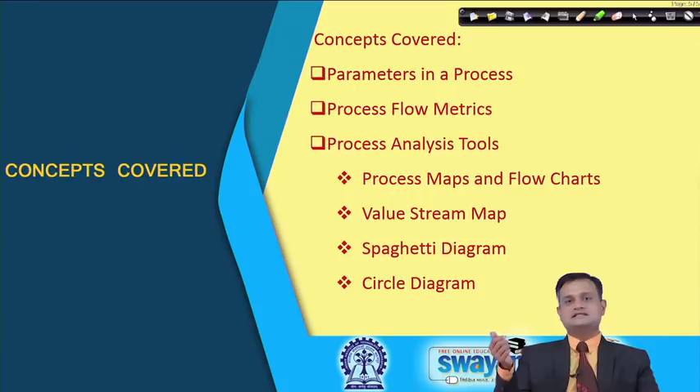So let us begin with a very simple question: what is a process? Some thoughts are coming in your mind, and let us try to put it in a structured way.

A process is a collection of activities that transform your input into output that are valuable to customer. So not that I will deploy the resources, machineries, equipments, people, setup, and I will just convert input into output. I need to see that my output is valuable to my customer. So any part of an organization that takes input and transforms them into output is a process. You may have a transactional process like accounting, finance, or maybe customer service, and you can have manufacturing processes like your regular production and other activities.

Process analysis is to systematically examine all aspects of the process to improve its operation with regard to cost, quality, speed and responsiveness. So I am putting here 4 different important criteria: cost, quality, speed and responsiveness. If my process can really satisfy these 4 criteria, then I would say that I am executing with a right and adequate process.

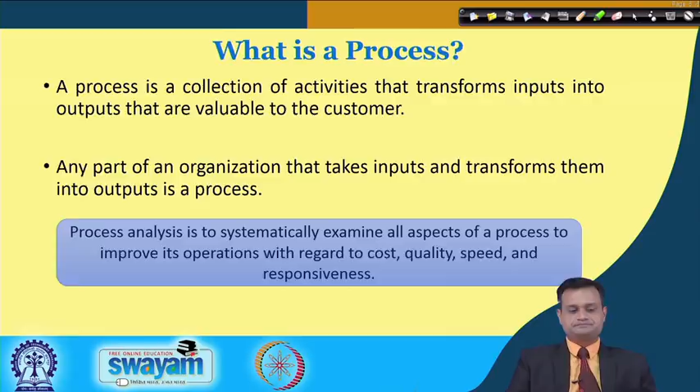So just see the input output diagram, and you will get an idea that every process has a set of inputs. It goes through the transformation process and you convert it into a set of outputs. Typically you have machine, man, material, measurement, methods, maybe your mother nature and management. These are the typical inputs which go into the process of transformation, and as a result you have output, product and services.

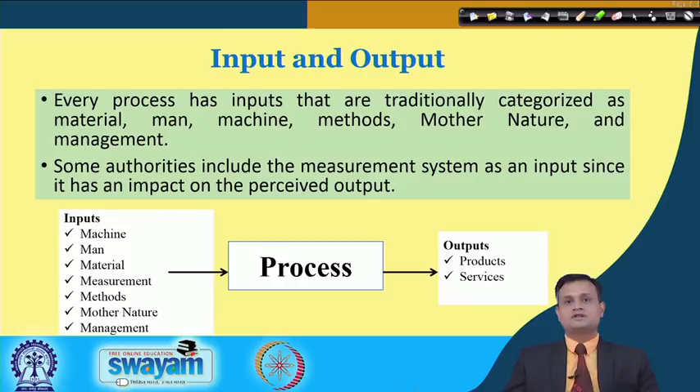So there is an important tool in order to analyze the process, because please understand that process is not something which is taking place in a very narrow domain. When we talk about process which can satisfy the customer requirement and leads to value creation for the customer, then it is not only a functional process, we must broaden our understanding on the scope of the process.

So here there is a very important tool called SIPOC. This tool basically helps us to jot down the various issues specific to processes taking place at different places in the value chain, in the supply chain, and then it helps us to see the proper linkages, set the metrics for regular and continuous monitoring of the processes.

So supplier is basically the internal and external providers of resources, materials, sometimes knowledge and services that the process requires. If you look at the inputs, then the elements outside the process boundaries that need to feed the process so that it can function and produce the necessary outputs.

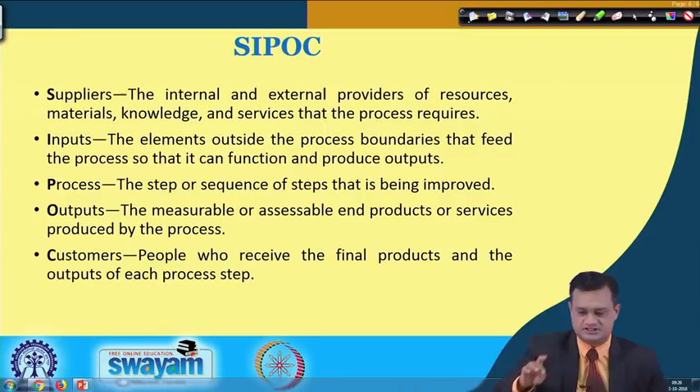This decides the quality and hence the experience of the customer. So, with this understanding, let us try to appreciate the application of SIPOC and how systematically it can represent the key features of my process.

So, there is an example of a SIPOC form. You can have different kinds of templates to be used. Here it is just from the courtesy of Minitab. So, you have a supplier, input, description, requirements, you have process, you have output, description and requirements, and then you have the customer.

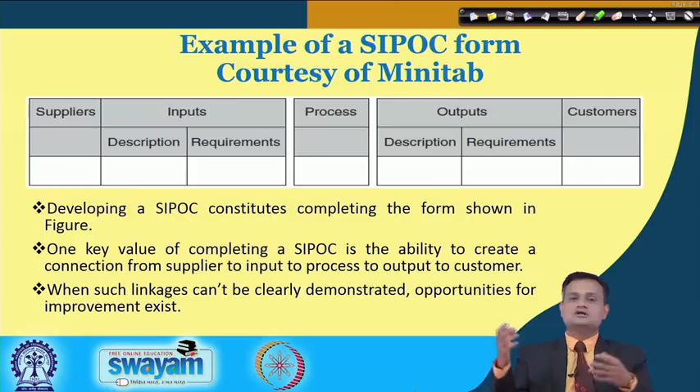Developing this SIPOC constitutes completing the form typically shown here, and one key value of completing SIPOC is the ability to create a connection from the supplier to the input to the process and to the output to the customer. Please remember that SIPOC should not be seen as a disjointed format. It is basically trying to connect the various entities which are part of the process, right from the raw material to the final product given to the customer.

Process performance metrics is an important area to see the health of my process, to see the efficiency of my process, and process flow improvement is a significant Six Sigma goal.

I want to minimize the variability, I want to minimize the rework and rejections, I want to minimize my WIP, and I want to see that right from the raw material stage to finished product, I can have a very smooth flow of the process.

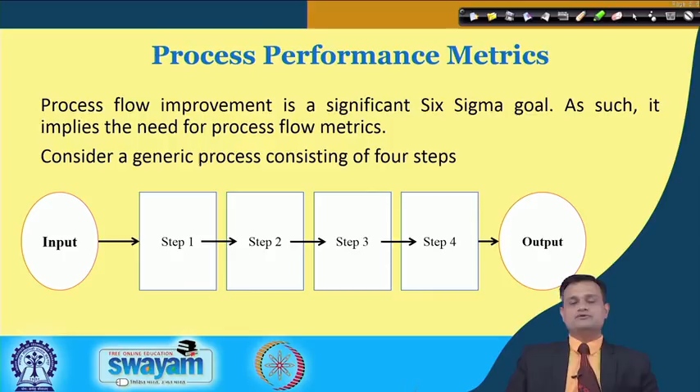So, we can consider a typical generic process where you have the input, step 1, step 2, step 3, step 4, so on, step n, and finally you get the output. Let us see a couple of important process performance metrics.

One is WIP, it is the material that has been input to the process but has not reached the final stage. This includes the material being processed by the various equipment setups or through steps in the overall process, and WIP is necessary. I will not say it should be 0 all the time, but too much WIP is a clear cut indication that the synchronization among your various steps and machines is very poor, and there is a difference in the capacity of processing at different steps.

Work in queue, WIQ, is the material waiting to be processed by some step in the process, and is one component of the WIP. You just see that you are visiting a restaurant and you are just sitting, nobody is attending you. Even after taking your order, you get the food after maybe 30 or 40 minutes, and this is a very painful period. The same applies to manufacturing or service segments. Whenever material or people have to wait, this leads to a poor flow in the system, and that reduces the overall efficiency of my system.

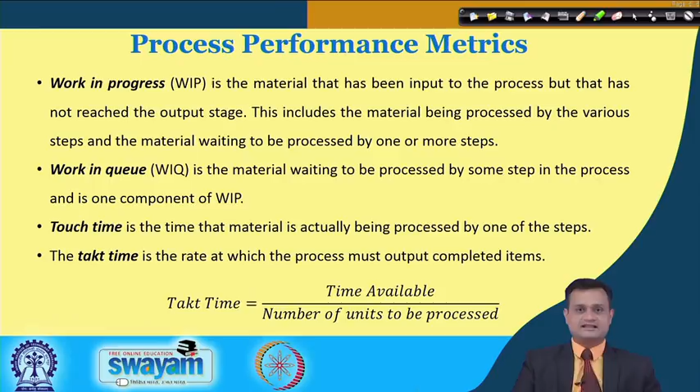Then you can have a cycle time. It is the average time for a particular step to complete one item. So you have step 1, step 2, step 3, step n, and however much time a particular step takes to complete the item, that I will call the cycle time.

If the cycle time is greater than the takt time, the required number of items will not be produced. In situations where several people can be performing the step, we can compute the number of people required as cycle time divided by takt time. So it is a very important observation: if your cycle time is greater than takt time, the required number of items will not be produced as expected, and we can compute the number of people required as cycle time divided by takt time.

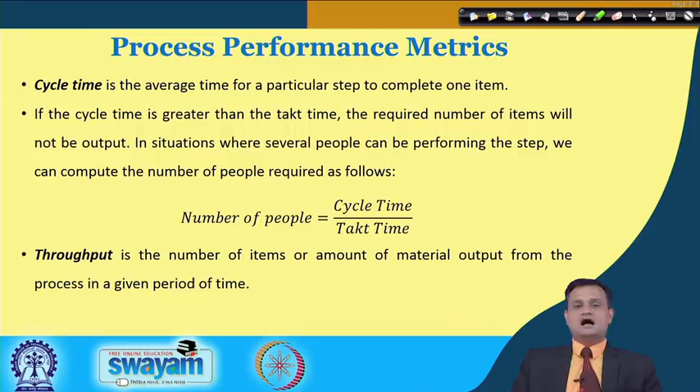Throughput is the number of items or amount of material output from the process in a given period of time. Please understand there is a difference between takt time and throughput time. In takt time, we go as per our target production, as per the demand of the market. In throughput, we just see how much we have produced in a given period of time.

Process performance metrics are very important in order to judge the health of my process. Once you know to what extent your processes are capable enough to meet your market demand, or to meet the expected speed, responsiveness, and cost parameters, then you can take those processes as the Six Sigma project which are extremely critical.

Value added time is the amount of time used for activities which a customer is willing to pay for. Now you would be a little confused, there is a touch time and there is a value added time. Maybe you have a setup time, or you are holding the product on a typical machine, and whatever time is spent there could be counted as touch time.

If we take the example of the service segment, you have entered a restaurant, you are attended by the manager and waiter, your order is taken - touch time started. But you would only like to pay for the material being processed, or in case of a restaurant, your order served, or the kind of quality you are getting, that is of food - then that is called your value added time.

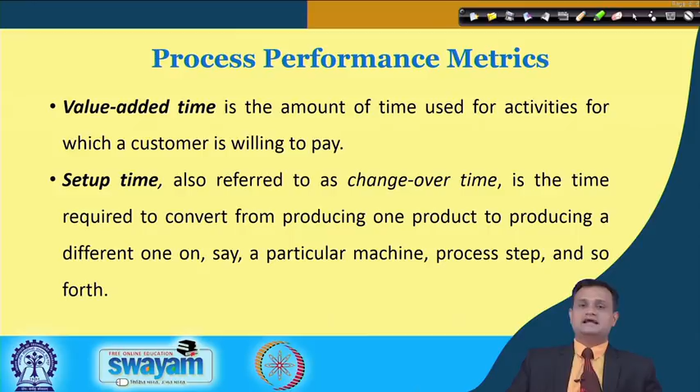There is a setup time, as I mentioned, referred to as changeover time - the time required to convert from producing one product to producing a different one on a particular machine or process step. We have to be extremely critical in our production schedule, and we cannot afford to have long setup time or frequent setup, because that reduces the overall efficiency of my processes and is detrimental to my value added time.

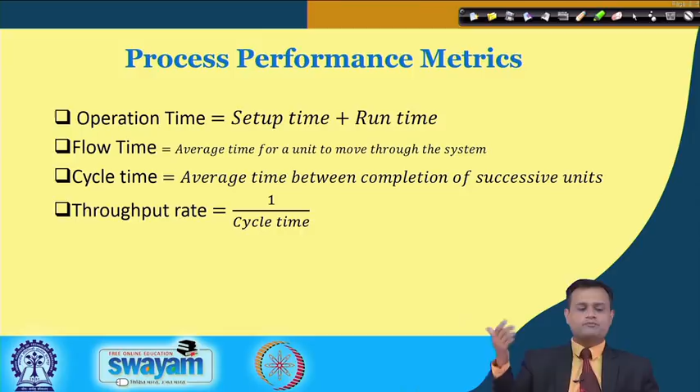Now if you see the operation time, that is the total time - it is setup time plus run time. Flow time is the average time for a unit to move through the system, the rate at which it moves through the system, that is your flow time. Cycle time is the average time between completion of successive units, and throughput rate you can count as 1 upon cycle time.

So there is a caution when we talk about performance measures: measures are designed to be used when a production system has reached steady state. This is a very important condition. Let us say you purchased altogether a new production system, or you are operating with a new service setup - now there are a lot of issues and a lot of turbulence. It means your system has not reached steady state.

So before you actually work on the various performance measures, you try to figure out and understand whether your process has reached a particular state of stability or not. Once this steady state is reached, only then process evaluation through different performance metrics is advantageous. Otherwise, this will mislead you to wrong conclusions, and you will start acting on aspects which are actually not part of the system.

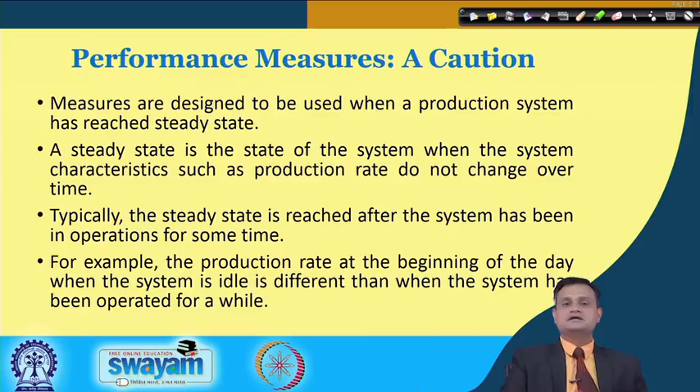So a steady state is the state of the system when the system characteristics, such as production rate, do not change over time, and typically the steady state is reached after the system has been in operation for some time. This is an important caution when we start applying the measurement evaluation of the process through different process metrics.

Now just see a simple example. There are 3 stages: stage 1 takes 2 minutes per unit, stage 2 takes 3 minutes per unit, and stage 3 takes 1 minute per unit.

Now, just assume this is an 8 hour working day. Now, here what do you think is the cycle time?

Each stage has its own time, and here whatever we discussed previously, you would be able to visualize better. Stage 1 has 2 minutes, stage 2 has 3 minutes, and stage 3 has 1 minute. So my cycle time would be the 3 minute maximum time taken by a particular stage, because unless this stage completes the transformation of the product or your raw material, you cannot really complete the entire product. So here I will consider 3 minutes as my cycle time.

My product can come out in 3 minutes from this transformation process, and my throughput rate is 120 units per day. Because I have considered an 8 hour working day, if you just deduct some allowances, this may go down, but otherwise my throughput rate is 120 units per day.

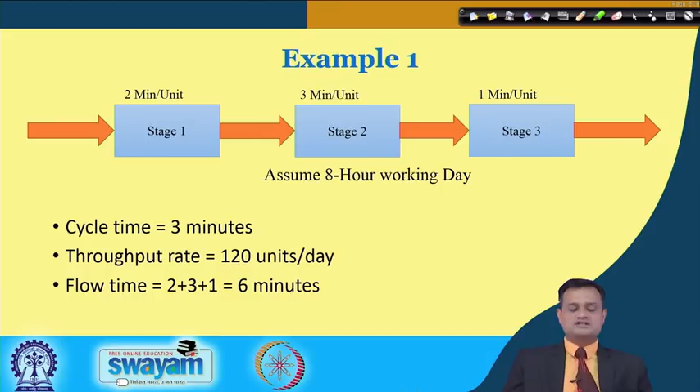So here please understand there is no mention of demand or number of units to be produced as planned. It is just the rate at which my system is operating. I have a flow time that is 2 plus 3 plus 1, this is 6 minutes.

So process analysis tools we would like to see, and this will basically help me to go deeper into the process analysis: process maps and flowcharts, written procedures, value stream map, spaghetti diagram, circle diagram. Let us see each one in detail.

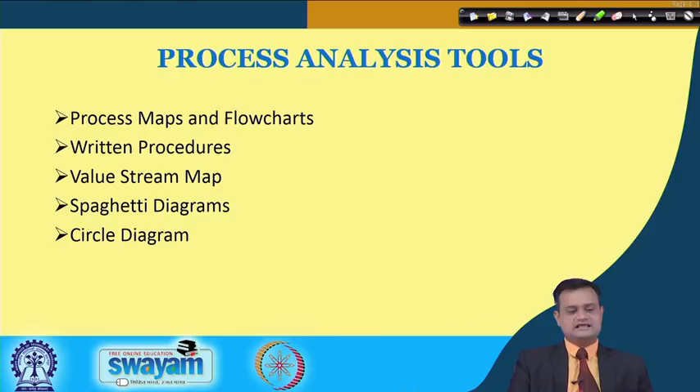So process map and flowchart, typically this enables and provides us the broader perspective of the process, and we can figure out the potential problematic areas and opportunities for process improvement.

So the format of this document, as I mentioned, may vary from situation to situation and company to company, but the overall purpose is to capture the various elements of the process and indicate the problematic areas or potential areas for improvement. So process map usually contains some additional information about the steps, including inputs, outputs, cost, setup time, cycle time, inventory, types of defects that can occur, probability of defect, and other appropriate information.

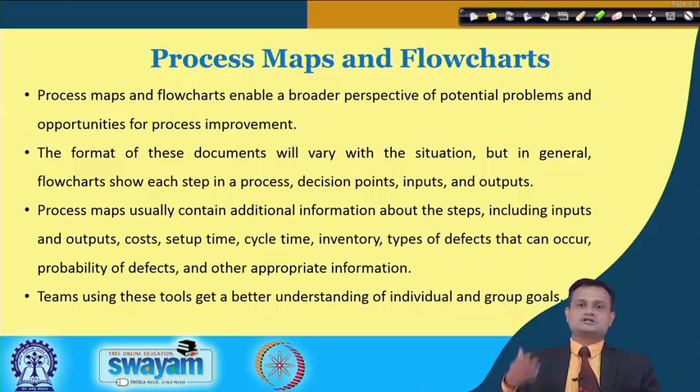So this will give you a bird's eye view of the process, and you can really understand the pulse of the process, how the process will actually be executed. So you have the process flow chart.

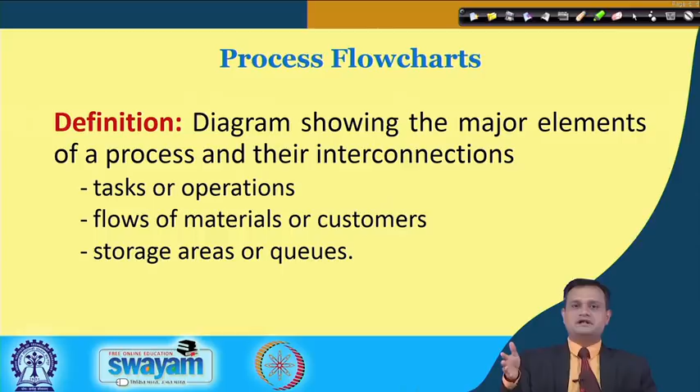So the definition is, it is a diagram showing the major elements of a process and their interconnection: task or operations, flow of material or customers, storage areas or queues, and so on.

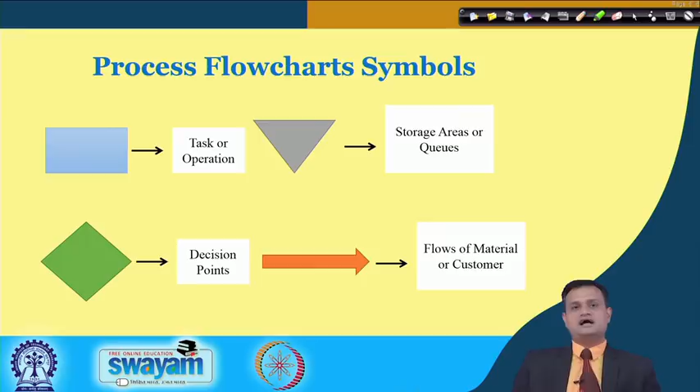So just see the various symbols we use in a process flow chart. You have something like a square or rectangle, that is task or operation. You have say a decision point, a diamond. You have say an inverted triangle, that is storage area or queues. You have an arrow, that is flow of material or customer.

This can be supported with the process diagram, and as I mentioned, various parameters like inventory or the defect rate or maybe the cycle time and other parameters can even be mentioned.

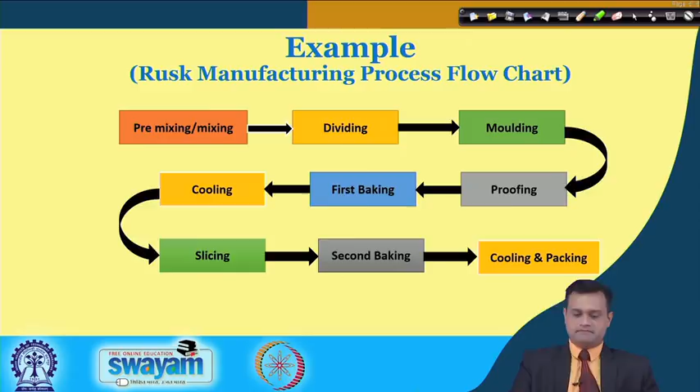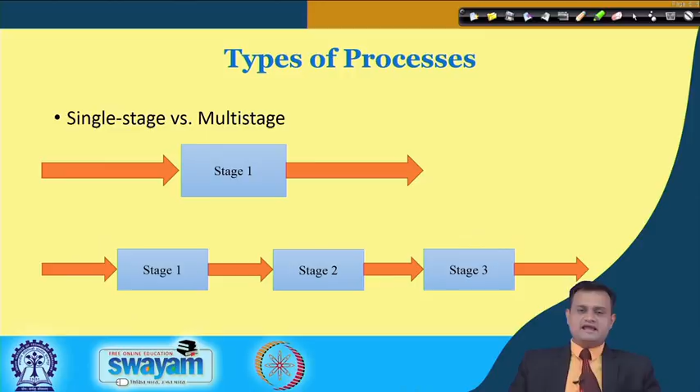So there are different types of processes. You can have single stage versus multi-stage process. So a single stage process gets completed only in one stage. Multi-stage, you have n number of stages to be executed in order to transform your input into the final output.

So multi-stage process with buffer is also possible, and you should refer to the theory of constraints critical chain by Goldratt, and in critical chain he talks about buffer. This gives the aggregate cushion buffer to the process, and you can improve upon your process flow.

So here blocking occurs - my stage 1 is not able to produce because stage 2 is slow and there is no place to keep my excess material produced, and I have to stop my stage 1.

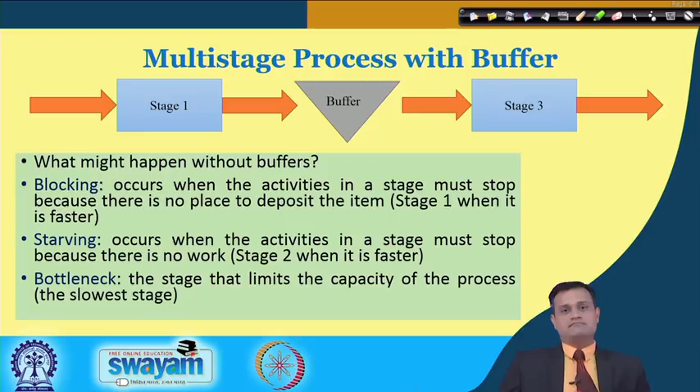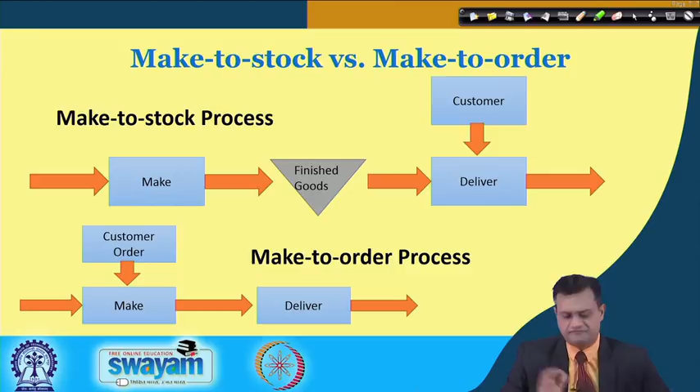So you can see very well here that there is a customer demand and then only the production cycle is initiated. So this is a pull based system - my customer creates the pull and then my production cycle initiates. So this is the difference between make to order and make to stock.

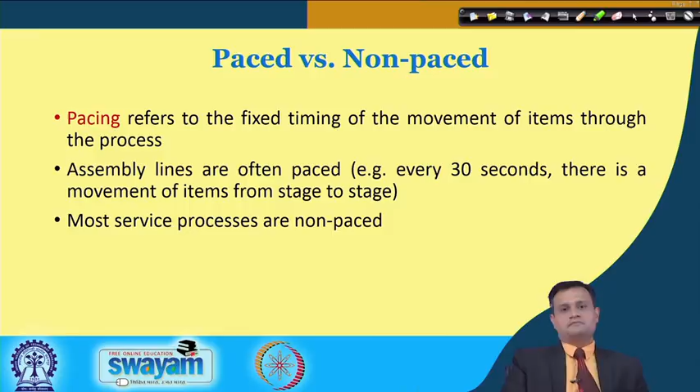Paced versus non-paced. Pacing refers to the fixed timing of the movement of items through the process. Assembly lines are often paced, so every 30 seconds there is a movement of item from stage to stage, and most service processes are non-paced. So you can create such kind of pacing in order to improve upon your flow management, and this is something where paced production, non-paced will come into picture.

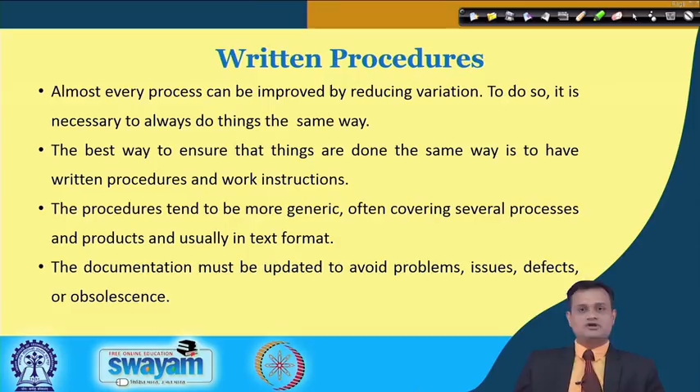So written procedures are something like SOP that you try to display to the workers and employees, so that they can understand the process requirement and religiously follow the steps, and the safety norms to be followed in executing the process.

So written procedures may include something like, as an example, work instructions for brazing A8106 to A8311. Tools and parts list: type 44 brazer, clamping fixture number D22, number 24, brazing rod, test fixture. Step 1, insert...

A8106, 0.5 inch into A8311. Step 2, clamp both the parts. Step 3, using number 24 rod, place a 3 by 8 inch bead at the joint. Step 4, water test in fixture number 76, and step 5, retouch as needed.

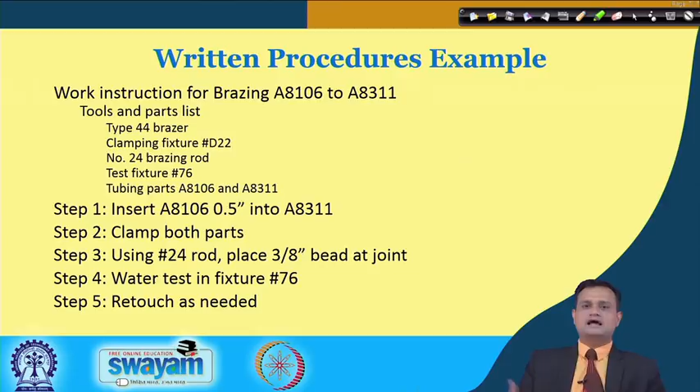So you can follow these steps without much confusion, and this will have a good impact on the process flow as well as the quality of the product.

Another important tool is the value stream map. Value stream mapping is a technique for following the production path of a product or service from beginning to end. The word 'value' is used because I am interested to see how much is actually the value adding time and what is the non value adding time.

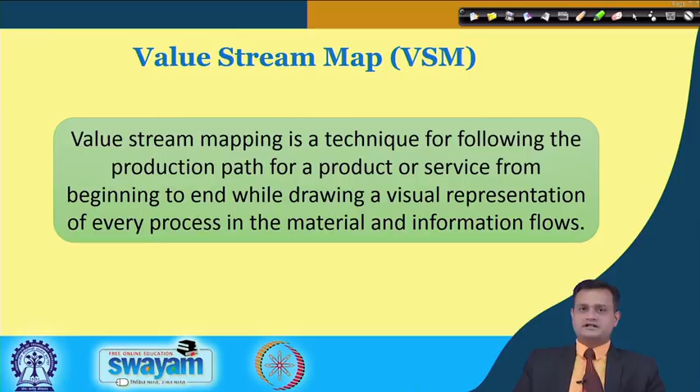Once I have this preliminary information, I can further dig out the reasons for my non value adding time, and based on that I can propose a future value stream map that can help me understand the percentage improvement in my productivity yield by reducing the non value adding time.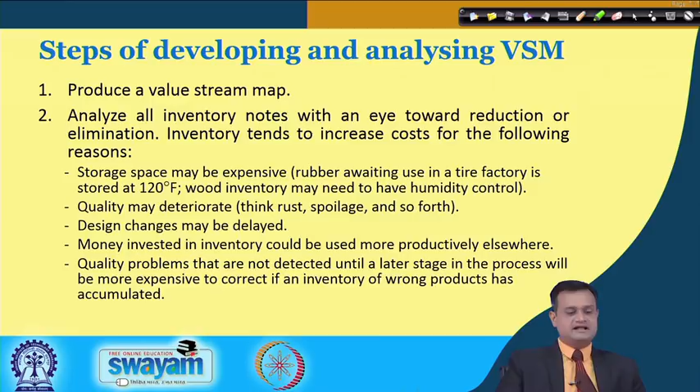So there are steps to be followed: produce a value stream map for the present situation, analyze all inventory notes with an eye toward reduction or elimination. Inventory tends to increase cost for various reasons we have seen - storage, quality may deteriorate, design changes may be delayed, money is invested and tied up, obsolescence may take place, and so on.

Third, analyze the entire value stream for unneeded steps - how can I reduce the non-value adding steps. Fourth, determine how the flow is driven; strive to move towards value streams in which the production decisions are based on pull of customer demand.

And number 5, extend the value stream map upstream into suppliers' plants, and new challenges occur regarding compatibility of communication systems, where you try to see that the flow of information, material, knowledge and money are synchronized.

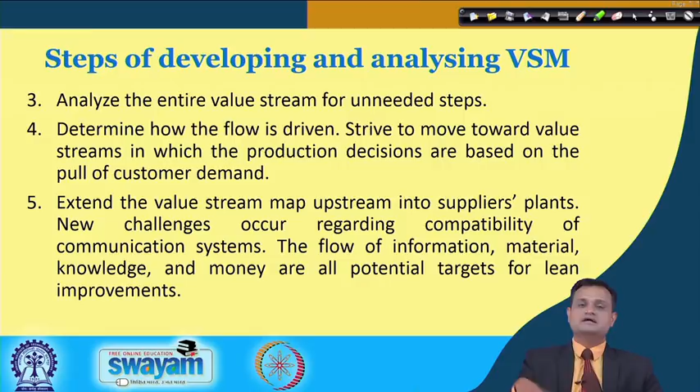Another very important tool in understanding the process flow is the spaghetti diagram, and you can see that a lot of interconnection is there. Typically this diagram is used to see the flow paths in an organization by material and people as they move from one place to another, and I can capture this through a camera, or put it on a pin board, or a string diagram can be used.

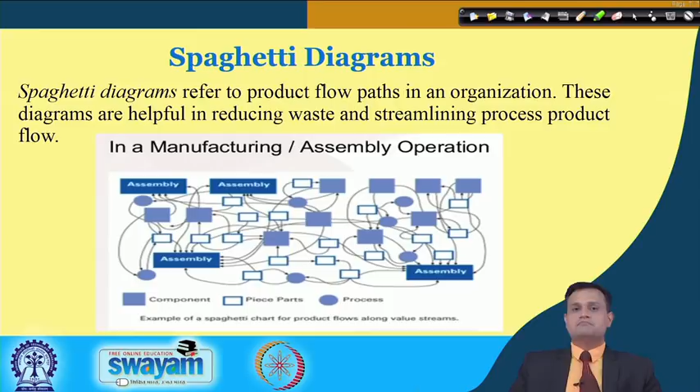I can see what is the overall aggregate movement, and this will help me appreciate the bottleneck areas and hence the action to be performed for reducing the bottleneck and improving the flow.

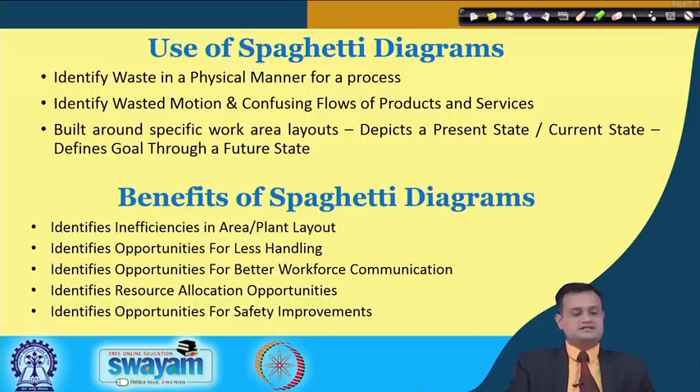So these are the uses of the spaghetti diagram, and as I have said, this benefits me in identification of inefficiency of area plant layout, opportunities for less handling, opportunities for better workforce communication. When you streamline your flow, your people feel comfortable, less burdened, and effective communication for action can take place. Safety will also improve because there is not much haziness in decision making, and you can allocate various resources optimally. So there are various simple steps to follow.

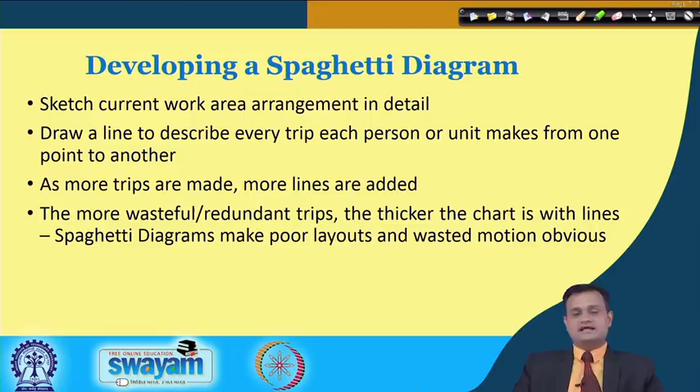Sketch the current work area arrangement, draw a line to describe every trip each person or unit of material is making. As more trips are made, more lines can be added, and more wasteful redundant trips can be identified. If you want to put man, material, information and other flows on the same diagram, you can choose different color codes, which helps you visualize even the synchronization among these entities.

There is a circle diagram, one more tool. Typically this is known as a handoff map and is used to show linkages between various items. In the form of a circle, I am trying to figure out the linkage between various items. Mark Blazey, in his book Insights to Performance Excellence 2008, uses this diagram to show how the Baldrige award criteria relate. You have the Malcolm Baldrige award, and there are various criteria like leadership, internal processes and others. Then how do you relate them?

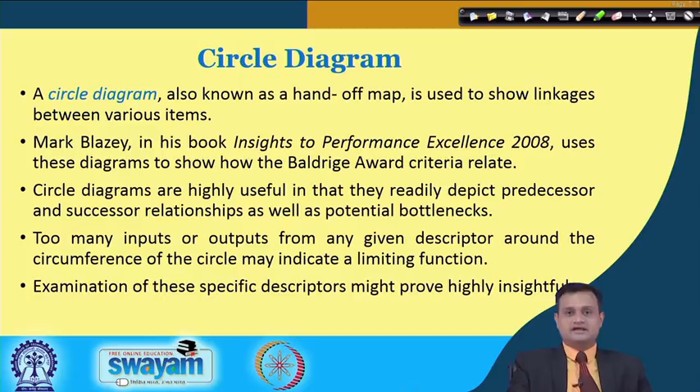If you can figure it out, then you can really put your emphasis on those improvement areas, which in turn can help you grow or improve your score in all other areas. So examination of this kind of chart or diagram can really help us gain greater insights.

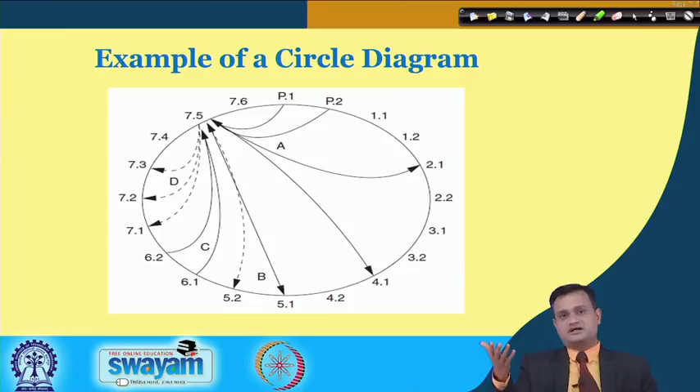Just see the example, I have put here some of the items. I am not labeling them, but you can see that in this circle, through the arrows, or by choosing the degree of relationship, strength of the relationship through a dotted line, full line and so on, I am trying to portray the connection and strength of the connection within the circle. It is called the circle diagram.

Before I end this session, as usual, I would like to pose a couple of questions for your introspection. Let's say, develop a spaghetti diagram for the operations carried out in an automobile service center. You can visit the nearest service center, focus on a couple of activities, and try to develop a spaghetti diagram to see how the movement of material, man and information is taking place.

Question two: what is the importance of circle diagrams in process analysis? Could you justify your answer with an example from your industry, or you can visit an industry to find out.

Third, develop a value stream map for a typical manufacturing process in the steel industry and show how the information and material flow takes place in the value stream map.

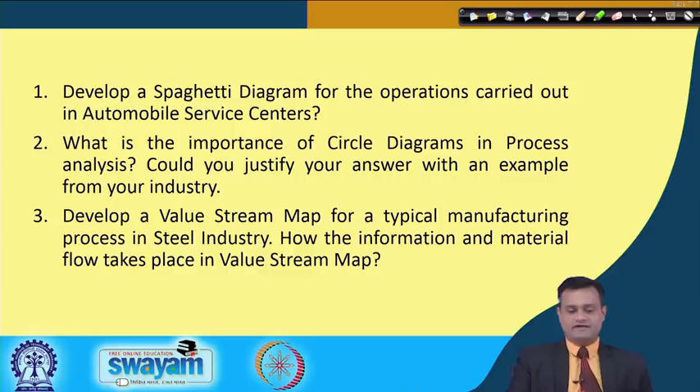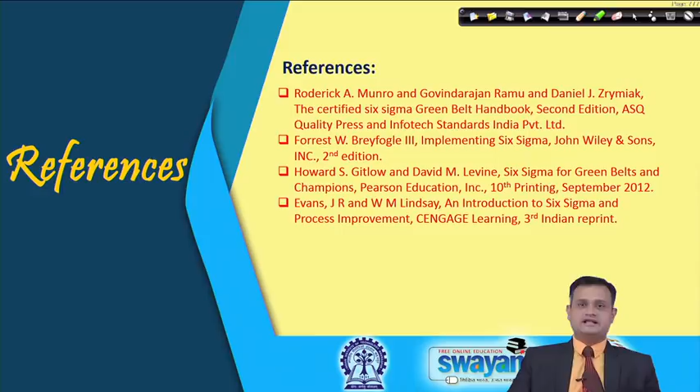So finally, as a conclusion, it is extremely important to define and document processes. If you cannot define, if you cannot measure, you cannot improve. So you must define, measure and document the process knowledge, thereby reducing process variability. That is one more advantage.

Like today, I am imparting knowledge through online media. This is recorded and will remain in the library forever. The same is the case with processes - when you record them, you can easily transfer the knowledge to new people with very little difficulty and a lot of ease in the transformation.

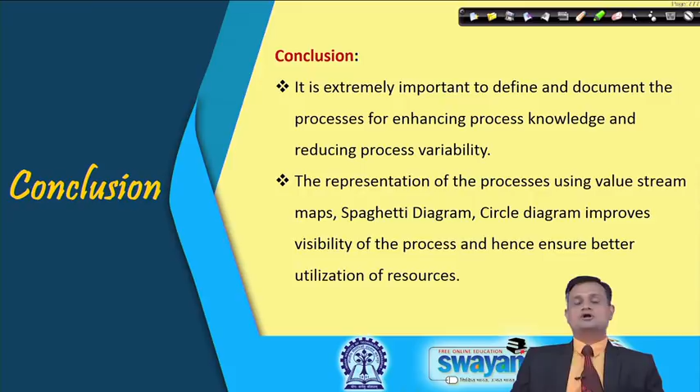The representation of the process using value stream maps, spaghetti diagrams, and circle diagrams improves the visibility of the process and hence ensures better utilization of resources. So with this, thank you very much.

We have started our discussion on process analysis today. We have seen a couple of tools which can really help us, and there are important metrics like cycle time, throughput time, takt time, and flow time, which can help us judge the overall performance of the process. So try to take a case, visit the industry, document the various areas and activities, and try to calculate some of the measures that will help you better internalize the concept. Enjoy, be with me.